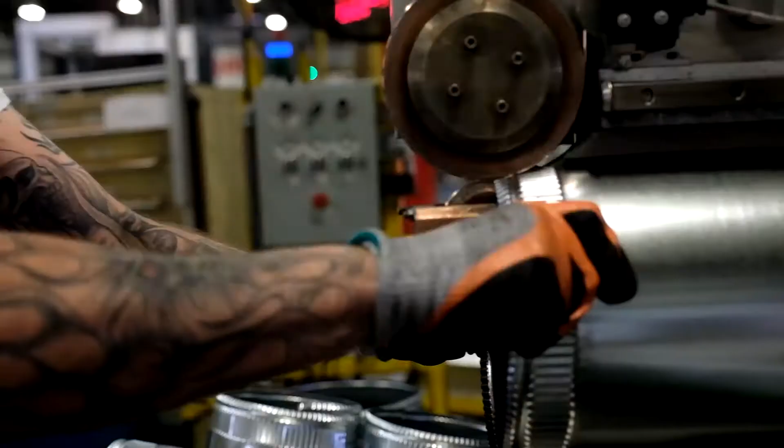Hello, and welcome to DMI Companies and Bots IQ Virtual Manufacturing Day. My name is Doug Gutenberg, and I am the Chief Operating Officer for DMI Companies. My responsibilities include overseeing the day-to-day operational functions of the business. DMI Companies is a manufacturer of heating, ventilating, and air conditioning commercial and industrial ducting and ducting components.

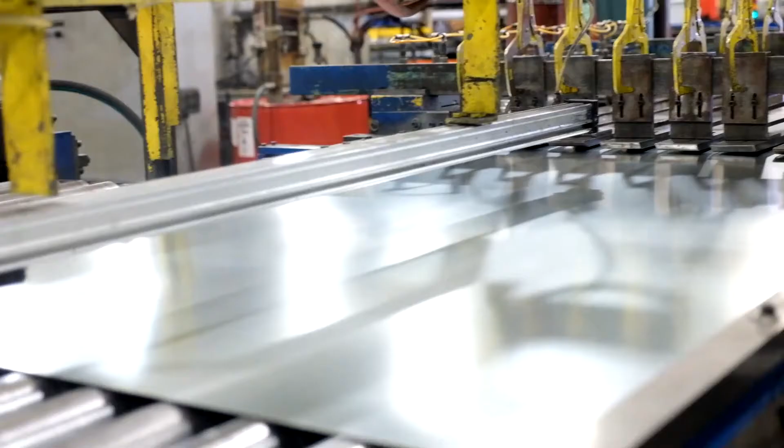Roughly 75% of the raw material we use to manufacture our products consists of sheet steel and primarily galvanized. Our products are used all over the US and Canada as well as around the world. Our products find their way into hospitals and healthcare facilities, making DMI Companies an essential business throughout the pandemic, as many of our products were used for ventilation in the temporary pop-up hospitals for COVID patients.

For over 40 years, our products have been installed in commercial office buildings, sewage treatment facilities, data centers, airports, hotels, casinos and restaurants, and large skyscraper office buildings. And yes, by the way, sports arenas, stadiums like Heinz Field, Ford Field, home of the Detroit Lions, and the Atlanta Falcons home field, Mercedes-Benz Stadium, just to name a few.

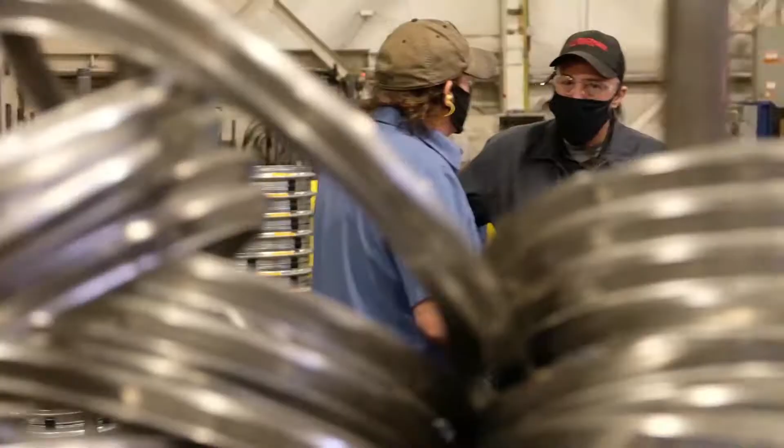At DMI Companies, we recognize that our success starts with our workforce and with the communities in which we operate and our employees live. DMI holds its obligation to corporate citizenship to a very high standard and facilitates that standard through our actions and programs promoting sustainability, safety, wellness, workforce development, and above-board reputation.

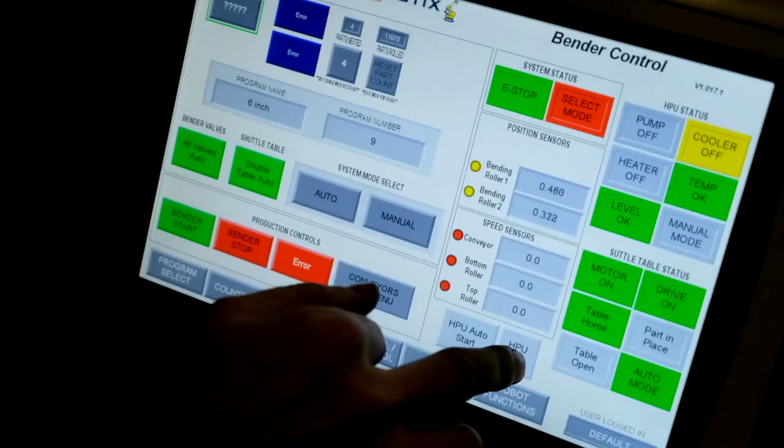As the world of manufacturing continues to advance through automation, robotics, and artificial intelligence, as with many manufacturing companies, DMI Companies works hard to stay at the forefront of the ever-changing technology within our industry, and we are looking to you to one day be the next generation of manufacturing leaders to take the art of making things to the next level. Welcome again. Please enjoy the event.

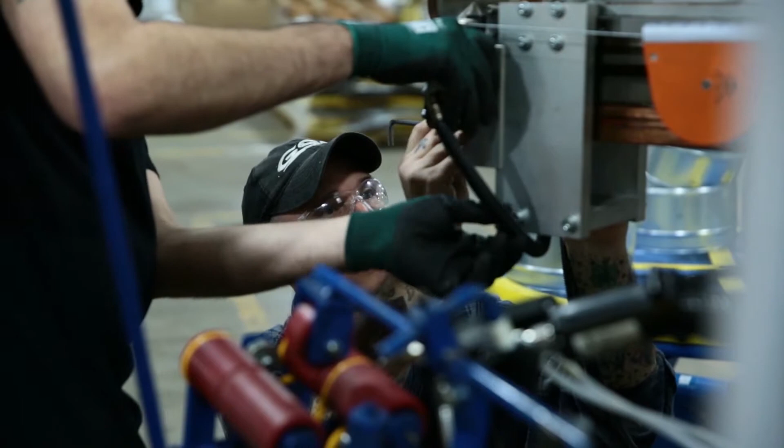Today we're going to introduce you to some of the people that make up that talented workforce. We're going to show you what they do and how their efforts result in the products that make your everyday living safer and more comfortable. You will meet DMI employees with a variety of different career paths and backgrounds, but what they all have in common is that they have taken steps to be very successful in their chosen careers.

They will share some of these steps with you, so hopefully you can benefit from their experience. At the end of today's session, you will hear from Steve Gerba, our automation engineer, who participated in several programs throughout his high school and college careers, including Bots IQ and recurring internships here at DMI. These experiences helped him learn about multiple career options and decide which one was right for him. Now, less than a year out of college, Steve is highly successful and doing what he loves right here at DMI. If you see something today that interests you, make sure you come back to our next session that will provide more details about individual career opportunities in exciting, high-demand occupations and how you can explore these opportunities at DMI through work experience programs like Steve did, or come here through full-time employment. So thank you very much for joining us today, and we hope you enjoy your visit.

Thank you, Katie. Katie is the one you want to know if you're interested in exploring a career here at DMI. But let's get started talking to our DMI technical team. To kick us off, we're going to talk to Steve Simcu. Steve is the CAD and project manager here at DMI Companies. He's also been a Bots IQ industry advisor for many years, sharing his passion, knowledge, and expertise with Bots IQ students across the region. So let's go.

Hey, I'm Steve Simcu. I am CAD and project manager here at DMI Companies. I'm in charge of making sure all the drawings are up to par, as well as managing my own projects. My career path is I actually went to college for mechanical drafting and design, and I went to Idaho State and then came here to Pittsburgh and finished off at CCAC, and now I'm in charge of all the CAD stuff. So typically how my day starts off is there's two different tasks that I have.

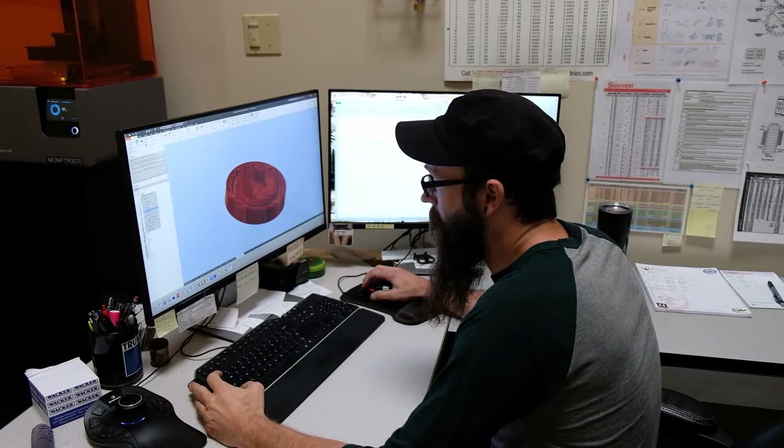There's the CAD side and the project side. So the CAD side, I review drawings from the other engineers, making sure they're up to par, they are correct, no errors. I also maintain laser patterns for the lasers that we have, make sure that they're cutting properly. I also make sure that our programs and our templates are up to date as well. On the project side, I'm in charge of designing either the products or the machines to make the products, and I'm also in charge of making sure my projects are coordinated per the timeline and that they're being done on time and on budget.

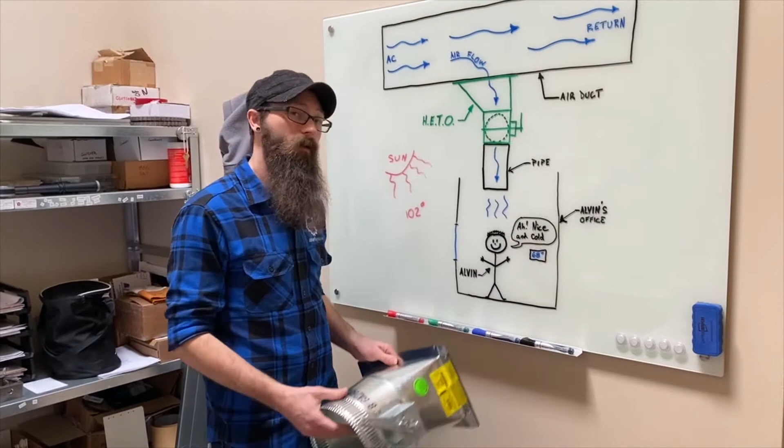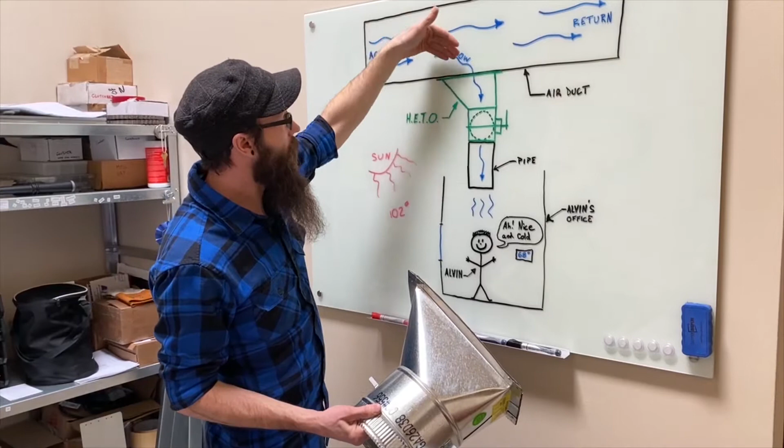So as I mentioned, we take care of the laser patterns for the laser. So what that means is I take a 3D model, make it flat, take that pattern and send it to the laser. So one of the items I'm going to demonstrate on CAD that we send over to our laser is the high efficiency takeoff, HETO for short. What it does is your air flow, AC, comes into your ductwork from your unit, and it transitions the airflow into the location that you are in your house. So Alvin here is actually very nice and cold because it's 68 degrees instead of 102 outside.

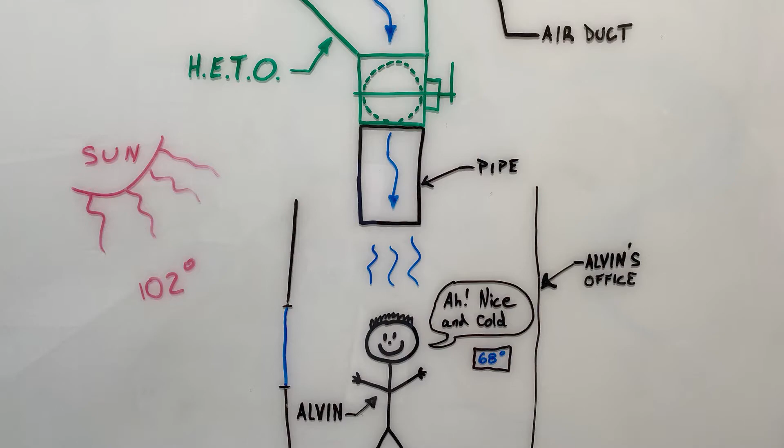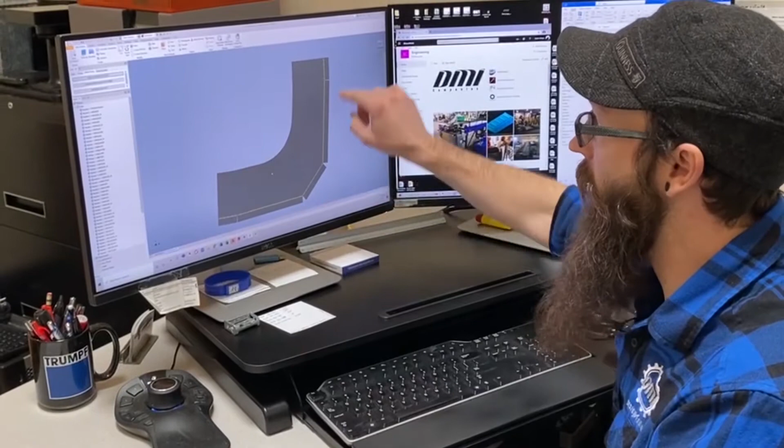So what we'll typically do is model it up, a 3D model, make sure all the parts fit properly and everything, and then once we're done with that, I'm going to jump to the individual piece that we laser cut. We take this and actually flat pattern it, and we'll laser cut this profile out of a flat sheet of material, and then it'll form to the parts that we need.

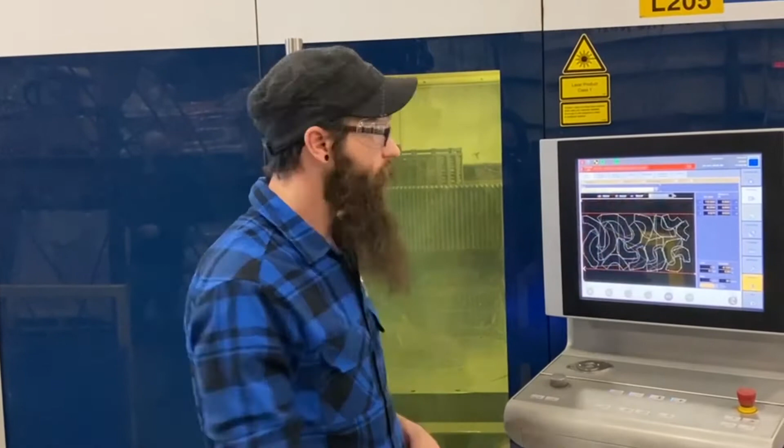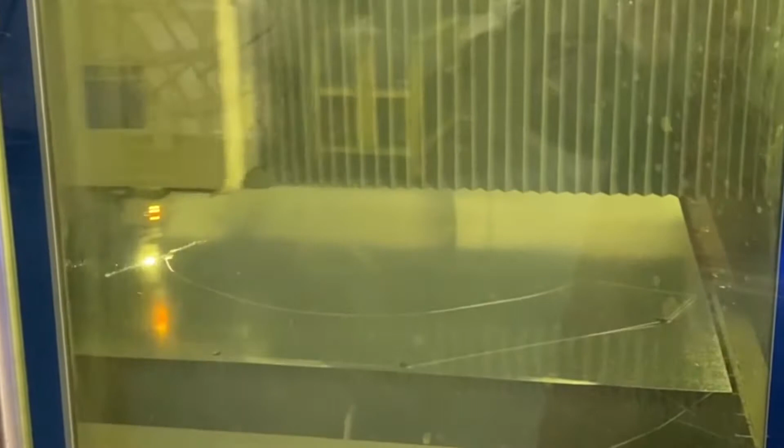So let's go over to the laser. So once we have the laser pattern done, we send it over to the laser and put it in our system, and it actually cuts out from this profile. So once it's ready, we hit start and it'll cut. All right, let's see what we cut.

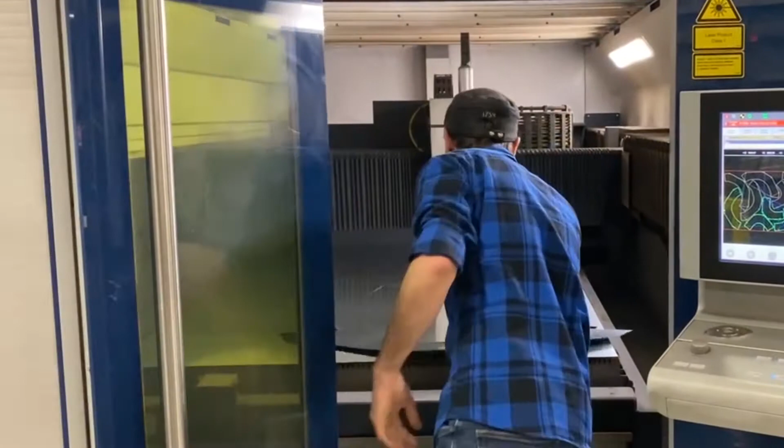Next on our tour, we're going to speak with Brian Rudolph. Brian is the production manager here at DMI Companies. He's going to show us today a fire smoke damper system, and we're going to watch a really cool demo. I'm excited to show it to you, so let's go. Hi, my name is Brian Rudolph.

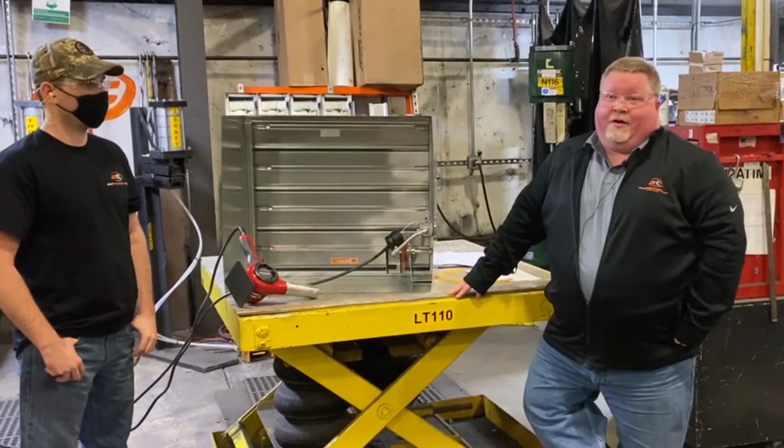I'm the production manager for Air Technologies. We've been making fire dampers and ceiling radiation dampers, combination fire smoke dampers here in Monongahela since 2004. All of our products made here are designed to give first responders and firefighters more time to get to bad situations, allow people to get out of burning buildings, help evacuate smoke, and protect our first responders. What I'm going to show you today is a demonstration of how the combination fire smoke damper works.

This is our most efficient product that keeps smoke, flame, heat, and gases from penetrating through the duct system. These are used in big areas like corridors, stairwells, and elevator shafts, and they can be opened and closed by the building manager to evacuate smoke and allow people to get out of the stairwells.

So when this damper is installed in the duct system in the building and there's power to the building, the damper is in the open position. We're going to power it up and simulate that it's in the building and that there's power to the building, and the dampers will be in the open position.

All of our products have been tested from Underwriters Laboratories, so they've passed a strict fire endurance test, a hose stream test, air velocity testing, all types of different AMCA rated tests to make sure that they work underneath the most severe heat fire related conditions.

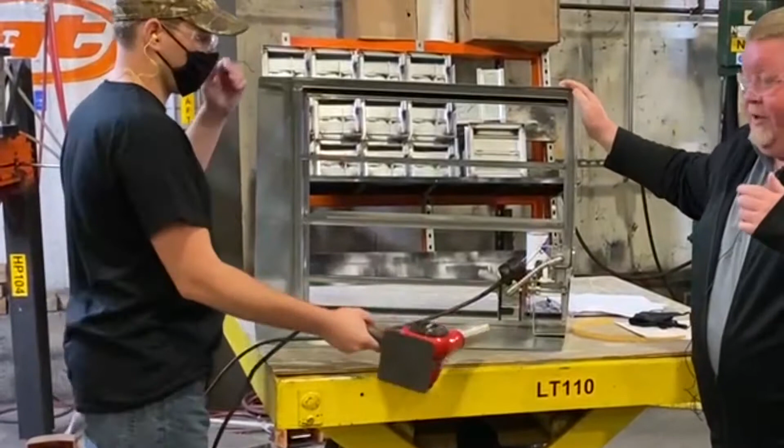So what we're going to do now is simulate the fire. When the damper gets hot, our temperature response device is going to recognize the temperature in the duct system. When it either gets to 165 degrees or 212 degrees, it will initiate the actuator, and the damper will close.

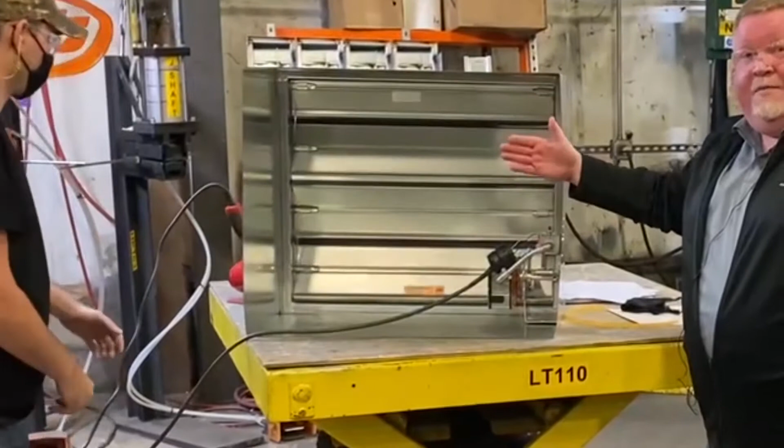Once this damper is closed, it won't allow any of the bad stuff—flames, heat, gas, smoke—to get through to the other side where people will be, leaving the bad situation.

Once it's done, we have to cycle test these every so often depending on the building codes. So we hit our reset pin here, and then it returns the damper to the open position. That's a successful completion of a fire smoke test and operational test—and that's a good damper.

The type of people we look for to assemble this product need to have a great attention to detail, be quality driven, and safety minded when doing this operation. You don't just get put here and start making these dampers right away, because of the technical attributes you need to have to make sure this product works right.

So you'll start in other areas and then migrate over here after you've had a little more time in ATI before. We need somebody that's got some experience and understands the UL listings and how the testing works, and how all of our dampers work before you come over and use this product.

STEM concepts and mechanical aptitude are very important, especially with this line, as well as the rest of the products we make. It's a huge benefit to have people with that background from high school or any technical school. Any technical training you've had prior to coming here is a huge benefit for us.

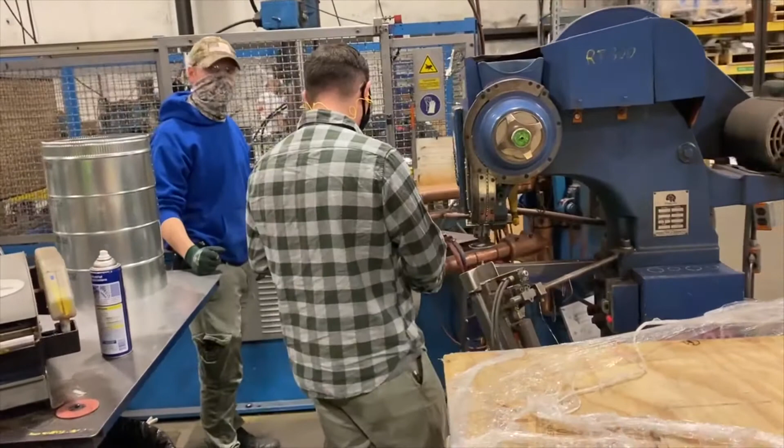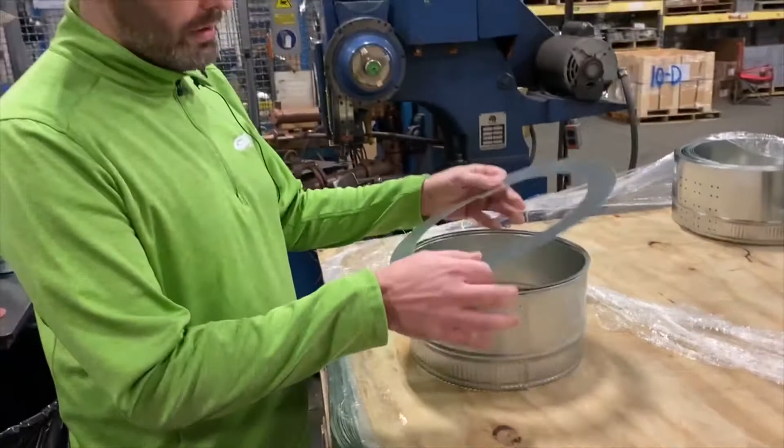Previously, our spun collar—this is our old style—we would have to use the flange, put it on there, and spin that on there. Our research and development team researched this machine out in Spain. This machine is also known to make instruments and automobile wheels. So this was our old style, a two-piece design, and we made a more efficient, user-friendly spun collar.

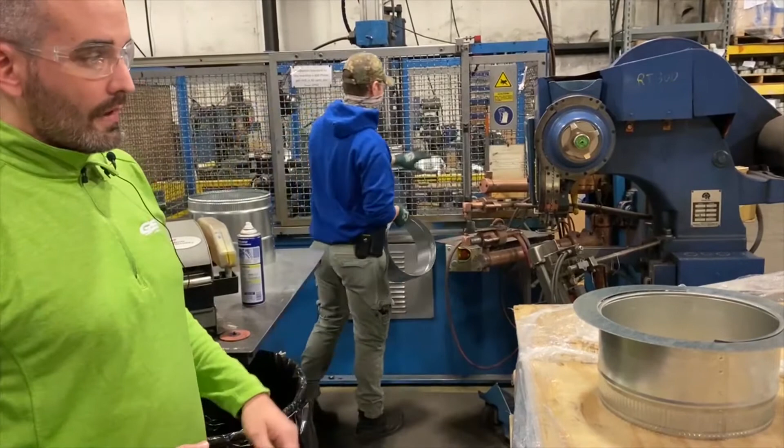We used to get 40 parts per hour with this. Now with the new machine, with the spin machine, we get 60 parts per hour.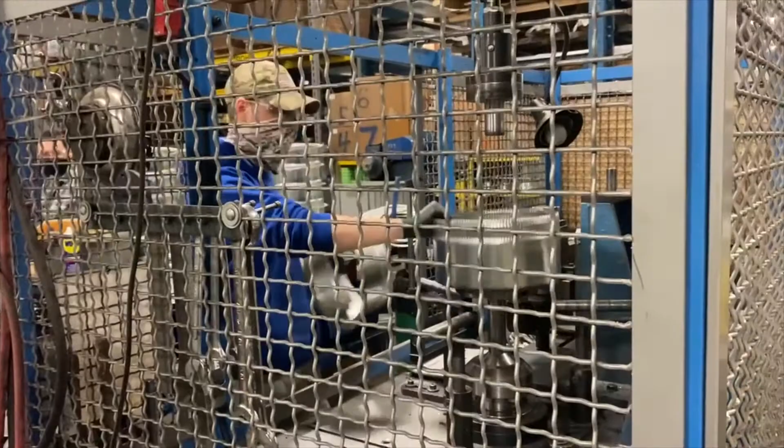So what we're seeing right now is a 12-inch spun collar. We use one piece of metal versus the old style two-piece. The carriage slowly draws that metal out to stretch it and make that flange. It's more efficient, easier to use, and also keeps the cost down.

Thank you, Sean, for an awesome example of how the manufacturing design process can improve production efficiency and lower cost while producing a better quality product.

Next on our tour, we're going to talk to Jason Marr. Jason is a design and manufacturing engineer here at DMI Companies. He has also been a Bots IQ industry advisor for Belle Vernon Area High School for many years. Like Steve, who we met earlier, Jason shares his passion, knowledge, and expertise in manufacturing with students and helps increase their understanding of the manufacturing and design process.

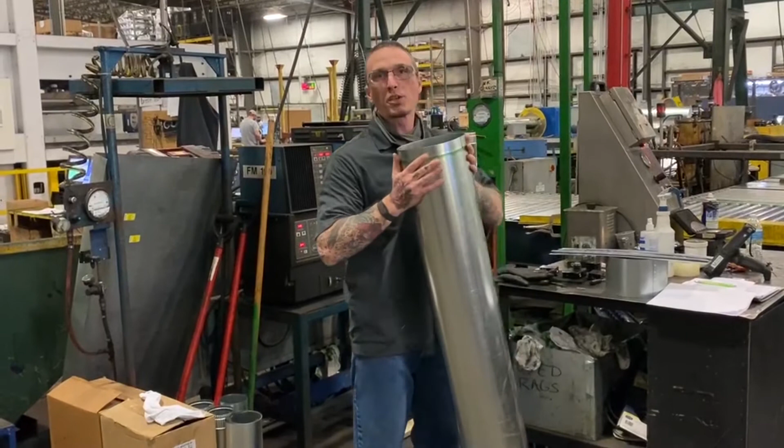So let's go. How are you guys doing? My name is Jason Marr, I'm one of the engineers here at Ductmate Industries. What I want to show you today is our automated pipeline. On this line we produce snap pipe, which has a crimped end and a gasketed end. On the gasketed end we put a polyurethane gasket, similar to this one here. When you put the two pieces of pipe together it creates a seal and prevents air leakage.

This is one of the only lines at DMI that runs from coil into a finished product. As you can see back there, the large 10,000 pound coils run into this line. It shears them off, does multiple operations coming down the line, and ends up at a 3-roll bender over here.

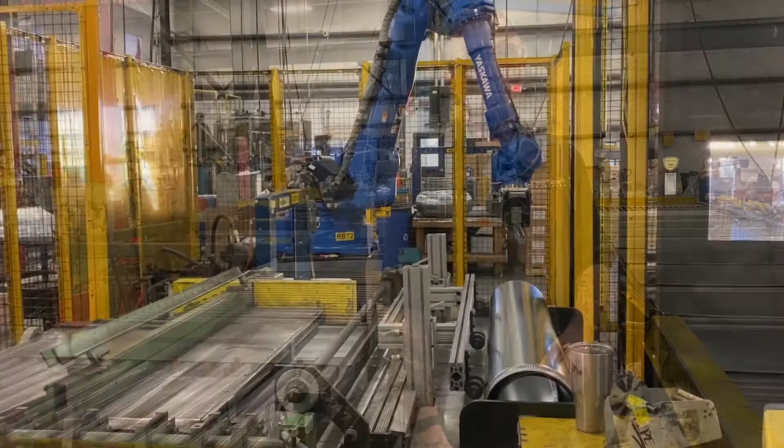This was a new addition to the line. On this finished part, it rolls up the pipe and the robot comes in and unloads the pipe, bands it, and puts it in its appropriate skid location.

Thanks, Jason, for providing a great example of a production line here at DMI Companies. Those coils are so big, 10,000 pounds, wow. Perhaps you saw at the end of Jason's clip a robotic arm picking up items and putting them in the correct location on the skid.

In our next stop on today's tour, we're going to see another robotic arm. I remember the first time I saw it, being mesmerized by its accuracy and efficiency. I can't wait to show it to you here in the mixing room with Joe Pusateri. So let's go. Welcome to DMI Companies.

My name is Joe Pusateri, I'm the production manager for Ductmate Industries. We are here today in our sealant and adhesive department to explain some of the automation we have added over the last three to four years.

What's really cool is we make everything from scratch. We start by putting all the ingredients in a 450 gallon drum. When we mix it up we put it on a dispensing pedestal, and once it's there, it all gets dispensed automatically into 1 or 5 gallon drums or buckets. The lid gets put on automatically, and the barcode label gets put on automatically.

The operator just manages that process now, picks buckets up, puts them in a box, slides it through an automatic tape machine where it automatically gets the tape put on, then slides down to our robot Betty. Betty picks it up and places it on the skid, as Betty was designed to do.

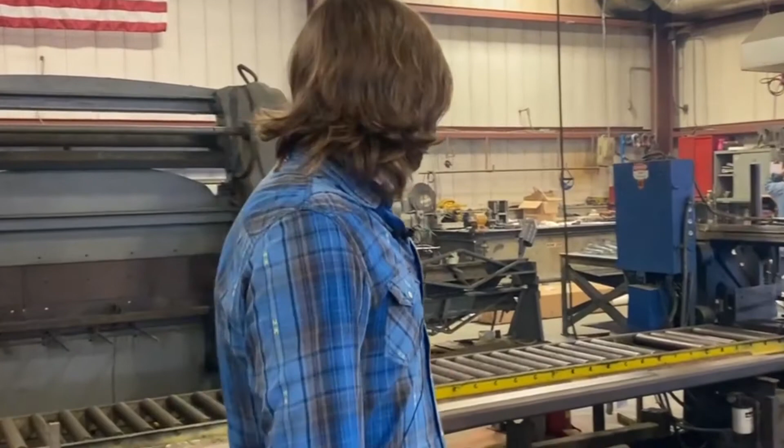All right, so this is our maintenance shop at Ductmate Monongahela. We have a lot of older machines, but they definitely do the job. Here we have a long, large horizontal saw. If you come this way, we'll see Eugene, our welder, welding some rings.

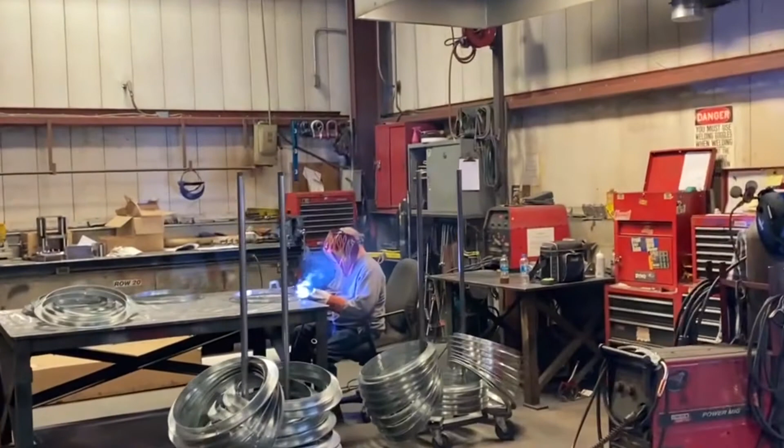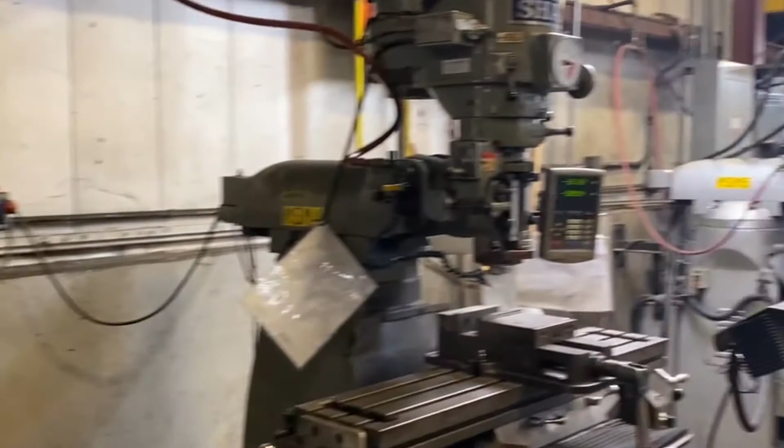Now, you don't want to stare right into the light, but this is Eugene welding, and he's an expert welder who can literally do anything.

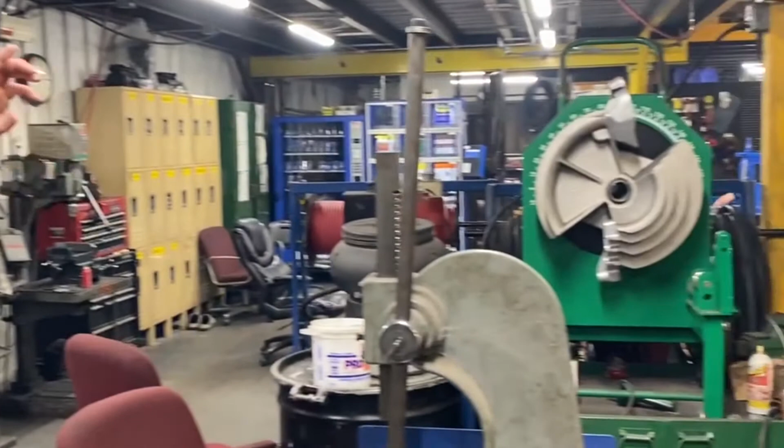If you come this way, we have a bandsaw, a CNC lathe, and another CNC machine here, where our machinists use these two lathes to turn down all of our bars, our rolls, our gears, things like that. And then if you come this way, this is where a lot of our machining tools are kept, a lot of the more expensive and very precise tooling. Over here we'll have our conduit bender and our large press, as well as multiple sanding and grinders down the road here, as well as our larger drill press. And that's pretty much our maintenance shop. We get it all done with just this stuff.

All right, so this is our parts press. It's half ripped apart right now because we had some bearing and oil issues. So in the downtime, part of my job is to go over some of the controls to improve, kind of update things a little bit.

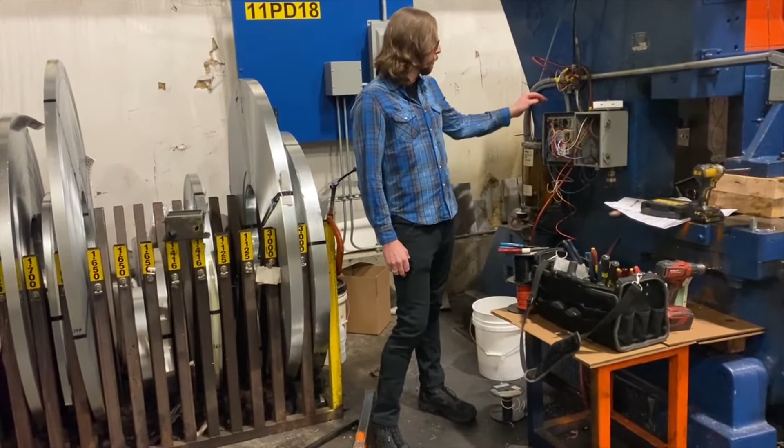And here we're actually adding some counters and timers to do different things with lengths of products. So what's going to happen is the press is going to cycle and press until we have a measured amount of time or material out of the press, and then we're going to actuate a cut cylinder, and then it's going to actuate a relay to reset the whole system and be able to start over as soon as the operator is ready. So that's what I got going on here in this halfway done wiring mess right now, but it'll all come together and look nice and neat.

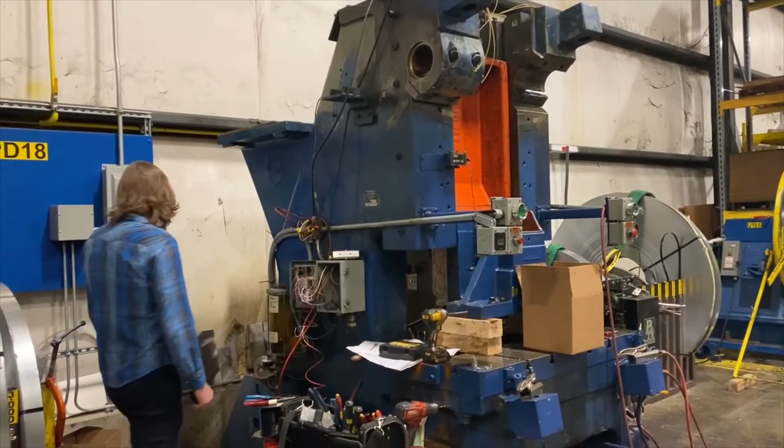One of the most important things that we do here at Ductmate is lockout tagout. Here we have our main power feed coming in, and the two technicians that are working on this, myself and the machinist Tom Prentice, both have this locked out, and we've gone ahead and verified that this machine can't operate and nothing can move on it while we're working on it. So that's number one, safety. Take care of yourself, because that's what's most important.

Thanks, Andrew, for sharing a little bit about your job. I think it's one of the coolest here at DMI Companies. Not only is every day a little bit different and you get to spend that day problem solving and troubleshooting, but you also have one great machine shop. Thanks also for talking a little bit about safety and how it's important in manufacturing, and especially here at DMI Companies. I think it's important to note the lockout tagout method that you shared with our students is something that many are unfamiliar with, and I encourage students to learn a lot more about safety in manufacturing.

The last stop on today's tour is to talk with Steve Gerba. Steve is a Bots IQ alumni and automation engineer here at DMI Companies. So let's go.

Hi, I'm Steve Gerba and I'm an automation engineer here at DMI Companies. So I'm a local graduate from Ringgold High School, and I also went to California University for mechatronics engineering. I got a Bachelor in Science in that degree. So in 2016, I came to take an internship position here at DMI. I was fresh out of high school, and I ended up finding myself as a lab technician where I got to work alongside all the engineers in their projects, which really got me involved.

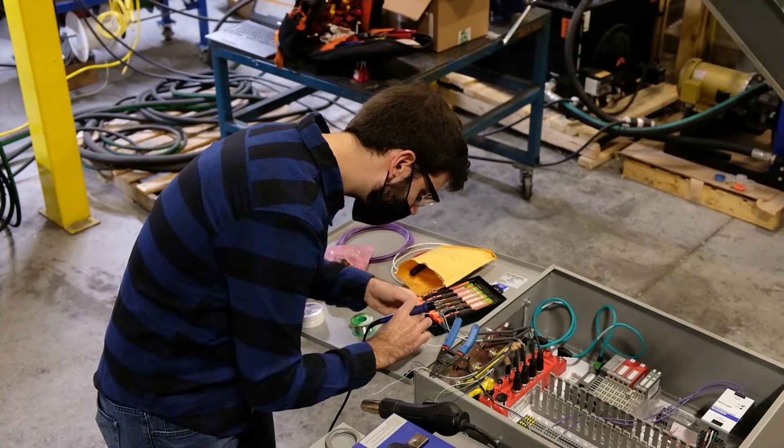And for some background, in high school, I just kind of found myself being almost like a maker. I loved making things, I loved fixing issues, doing problem solving. And one of the programs that got me really involved was Bots IQ. It was really there that kind of my passion for engineering took off as I got to work alongside a team of people building this robot. And it got me really involved with electrical engineering and machining. So that's when I kind of knew that's what my passion was to go for engineering.

So my role as an automation engineer in the company is I take some of our quote-unquote dumb equipment and I make it smarter and safer by adding logic and control to the systems. I also add safety devices to kind of monitor and also make it safer for our production workers to operate it. I play a lot with these little guys here. They're called PLCs, or programmable logic controllers. They're basically like a little microprocessor that you throw on a production line, and it can monitor and control the system.

So I get to do pretty cool jobs like playing with our 8-foot robot and doing unloading of our work cell that we have. I get to make custom equipment from scratch. I work alongside our mechanical engineers and kind of make our own equipment all in-house. Nobody's selling what we're making, so we take a lot of pride when we actually finish a machine and we actually get to start it up.

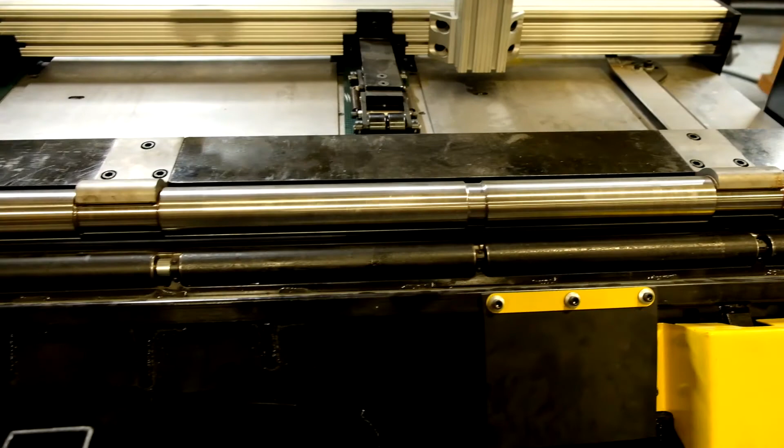Never in a million years did I think I'd be so happy to see some ductwork come out of a machine, but you just feel so much pride when you actually see that finished product come out and say, hey, we as a team got to build that. We made that all on our own. So during my internship, my first role was kind of as a lab technician.

I got to work alongside all the engineers on their projects and daily tasks. I got to help them out and assist them. From there, I got more schooling experience.

I came back the next year and got to shadow an engineer. Shadowing was one of the best ways to gain experience because you're with somebody who has 10 or 20 some years of experience. You can be on the floor with these people and gain all the knowledge they have on equipment and industry standards.

So the next year, with more schooling experience, I ended up taking the training wheels off. I got my own project and my own equipment to work on. Things began to grow as I developed more projects and they saw what I was capable of.

One of the most recent cells we did was in Wagoner, Oklahoma. We got to put in an entire production line there from scratch. I got to build all the control panels, all the power drops, and we're still adding on to it—adding more equipment and another robot to that cell.

These are all really fun projects for me because I love creating things. It was one of my hobbies, so I'm able to take my hobbies and turn them into a career. Every day is a fun day for me because I'm doing what I like to do.

Thank you, Steve. Bots IQ is extremely proud of you and the opportunities you've created for yourself at DMI Companies. Thanks for sharing how your experience with Bots IQ helped shape your career pathway. We're hopeful that many students watching are considering that opportunity themselves, whether through Bots IQ or another class, club, or activity. Manufacturing has a lot of career opportunities for youth today and in the future, and we want to connect kids with those opportunities.